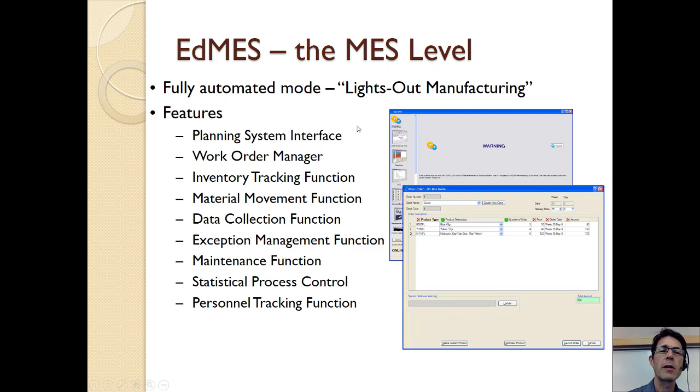What I want to talk about next, though, is what this first lab activity is going to be on, which is the actuators, and mainly actuators, not sensors yet. So an actuator is any kind of a component mechanism on the system that takes action. It either moves or it allows air to flow, or it's a vacuum cup that pulls a box and is able to grab a box and pick it up. So anything that's turning a device on or off, or adjusted, moved, rotated, whatever. So there are both rotary and linear actuators, and there are also vacuum actuators that turn the vacuum on and off.

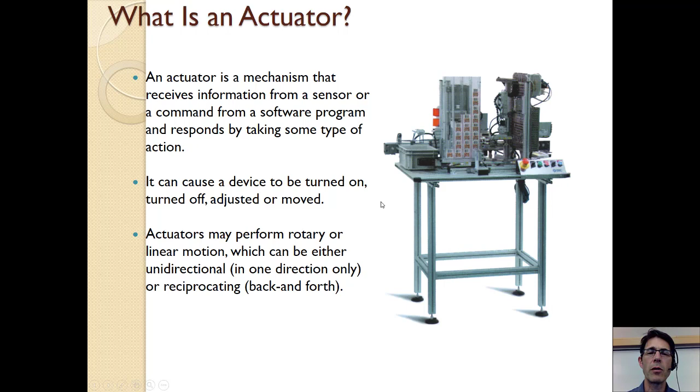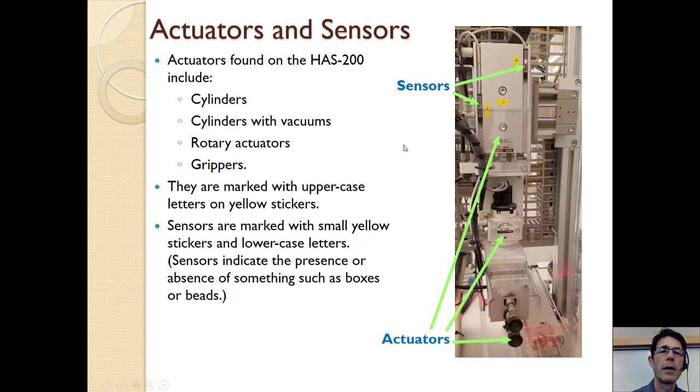All right, so I'm going to go through some of the different actuators you're going to see, because I mentioned Lab 1 is going to be about observing the actuators, and you're going to also be using the correct name of each of the actuators. So most of the linear actuators are dual rod actuators, and those are basically two cylinders in parallel, and it gives the cylinder a better pushing force when you have the two rods. It's just a little more stable and strong.

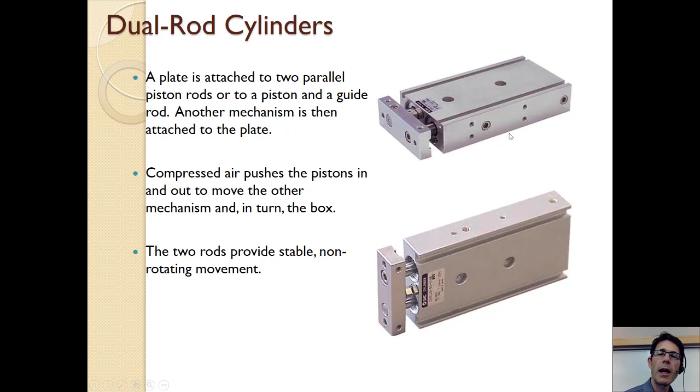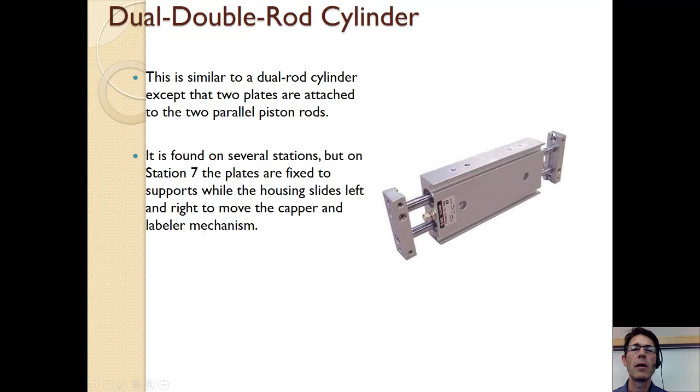So compressed air gets pumped into one side, pushes the piston out, and if you want to move it back, you can pump the compressed air in the other side and let it flow out of the other side. So these are basically air activated, and then back in the system there's an electrical valve that's switching to send the air either one direction or the other. Some of the actuators have rods coming out of both sides. There's a double rod cylinder. And there are a bunch on there that also just have a single rod coming out, which is a simpler version.

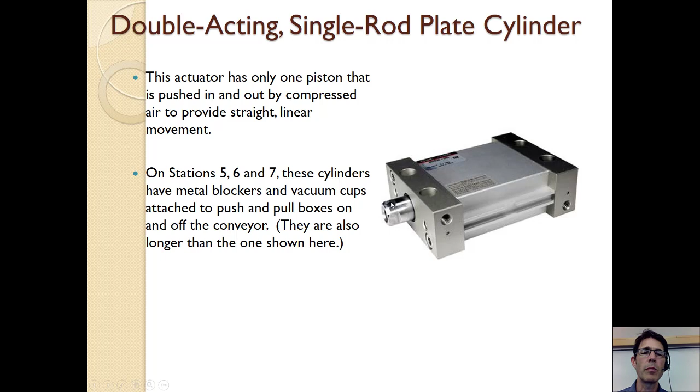Some of the actuators are used to pick up objects, like the box, for example, and in those cases, those are specially designed to have a hollow tube in the middle of the rod that you can hook up to a vacuum system and create suction so that then the vacuum cup can pick something up. So it could be done with a separate tube. It's just you end up with this big tube that's kind of flopping around. So it's just a neater way of arranging it.

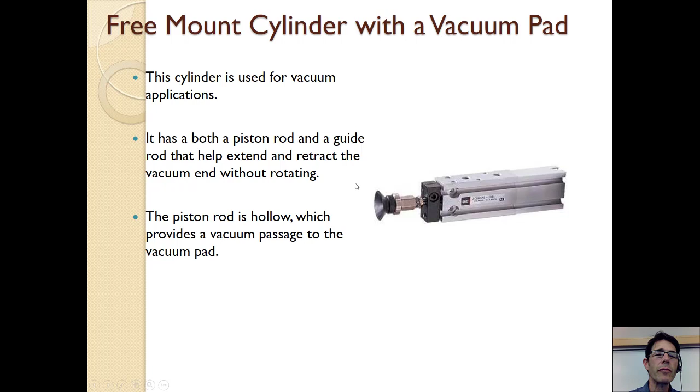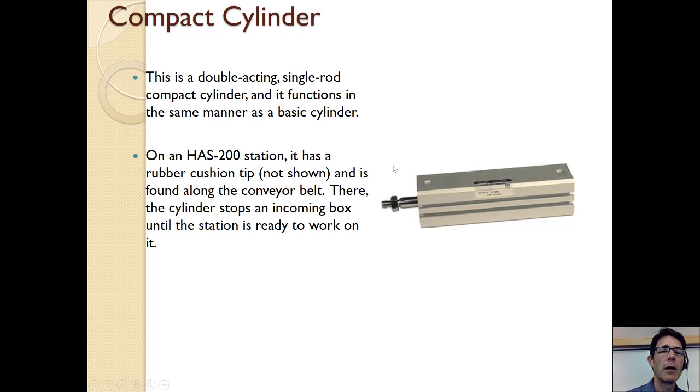And there are some very small compact cylinders that are just smaller size. Same principle. Air pumps in here to move it out. Air goes in here to pull it back. Let's see. Double acting. So this is just a different size actuator. It's another linear actuator.

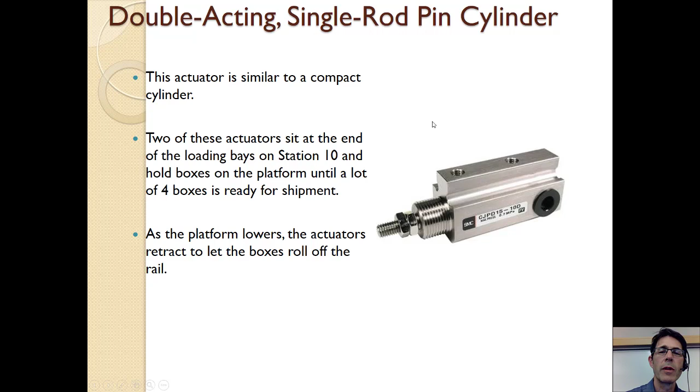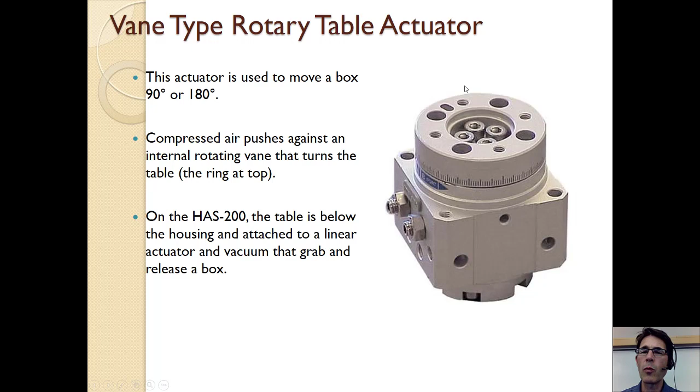Then we have some rotary actuators for moving either 90 degrees or 180 degrees, although they could be set to move any angle. But these are just, when they're actuated, they move, and then when you let them go, they spring back to where they were. So these are used anytime you want to grab a box and then pivot 90 degrees or 180 degrees and put the box someplace else.

So in addition to the pneumatic actuators, stations 8 and 9 that are the storage stations have some much more sophisticated electrical actuators, which is a brushless motor connected to a lead screw that can be positioned very precisely anywhere along that lead screw. So this is a whole different class of actuator. Later on, we'll be doing some exercises with that. But in the beginning of the course, we're just going to focus on the basic pneumatic actuators.

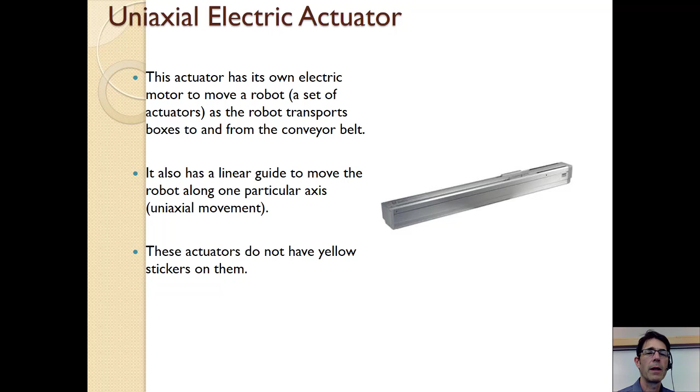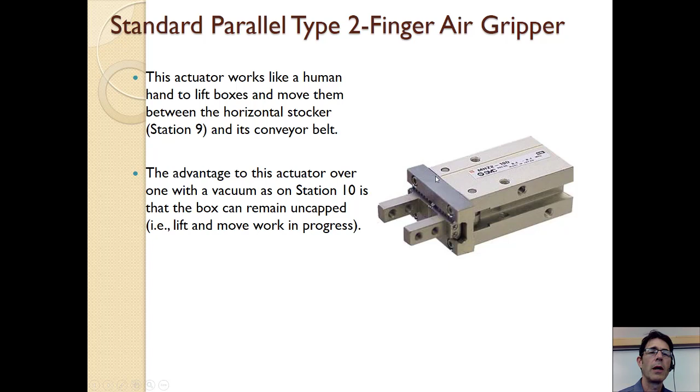So, okay, so that's an overview of the HAS 200. In the next video, I'm going to give you a little video demo of the system, the actual system itself, and then you're going to be starting to use it.